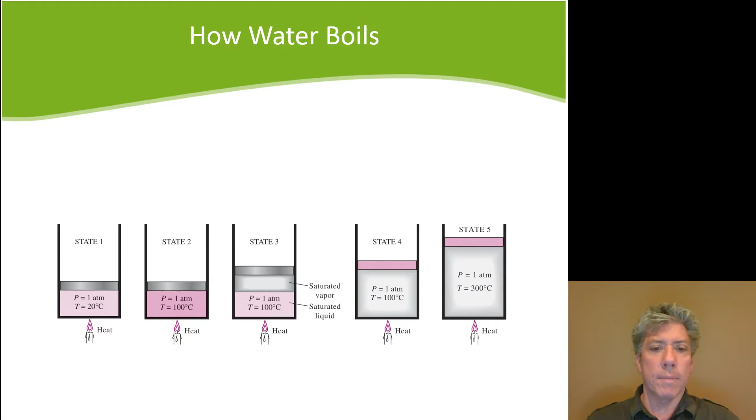So some terminology to make sure we get it right. The liquid at 20 degrees Celsius, 1 atmosphere in state 1 is called a subcooled liquid or a compressed liquid. And all that means is that it's below the temperature at which it could begin to boil. Once it gets to the point where it could boil at 100 degrees Celsius, we call it a saturated liquid. In other words, it could vaporize.

Now if we add a little more energy, some of it will transfer into the vapor phase. Now once we have both vapor and liquid, we call it a saturated liquid vapor mixture. Now be careful of this terminology also, because mixture doesn't mean that it's mixed up real well and we got vapor bubbles in the liquid. It doesn't mean that. I mean, it may be, but a lot of times we think about it as those two phases being totally separate from one another. So that's a saturated liquid vapor mixture.

Once we get to state 4, now we've got only saturated vapor. The last drop of liquid has boiled off, and we have a vapor that really is about to condense if we extract energy. But if we continue to add energy, then the temperature goes up above the boiling point at that pressure, and it becomes what's called a superheated vapor. And as you continue to add energy and the temperature goes up farther and farther, it's still a superheated vapor. It's above the temperature where it could condense out.

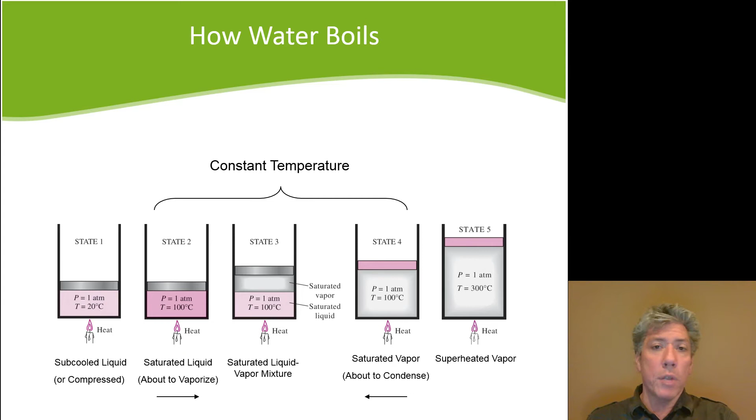Now notice that during the process of boiling, the phase change process, we observe constant temperature, and one of the reasons is that we have a constant pressure during that time. And it turns out we can only have 1 degree of freedom. So I'll talk to you more about what that means in just a little bit. But the temperature and pressure actually depend on one another during this transition time.

Now you can plot the saturation temperature versus pressure, or the saturation pressure versus temperature. In other words, there's a magical temperature given a pressure where the water will begin to boil. And it's not really magic, obviously, but it seems like it. If you change the pressure, then the temperature at which the water begins to boil changes as well. So there's a relationship between the two.

As a matter of fact, in the back of your book are what are called saturated tables. So you should grab a tab at this point. This is the first tab I'm asking you to add to your book. Table A4E and Table A4 are two tables that you should tab right now. So that's page 890 for A4E. I don't have the A4 page in front of me.

What you'll notice about the back of your book is that the appendices are first metric and then English units, but it's the same thing in both with a couple of really small exceptions. So for now, go and find those two pages and make sure you tab them saturation tables, okay? Because that's what they are, or steam tables. That's the way we'll refer to them as well.

Now, if you notice, the first column is temperature, the second column is pressure. Now, if you turn the page I think 1 or 2 pages, you'll notice that you'll have pressure as the first column and temperature as the second. Turns out that the data in those two sets of tables are exactly the same. Well, they represent the same thing, but they're for different data points, okay? But they're representing the behavior of water, or the chemical H2O.

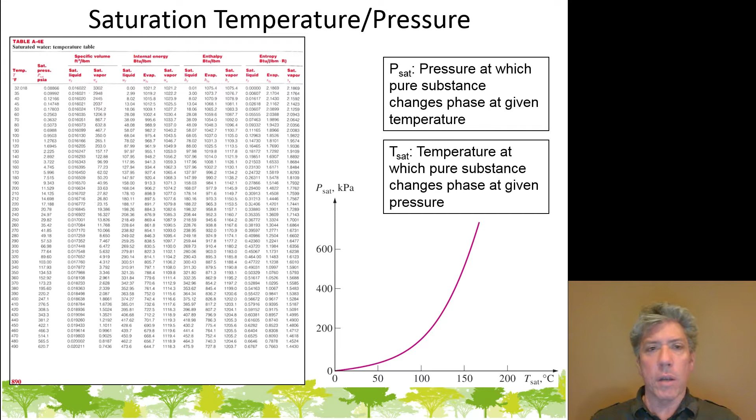Let's talk about latent heats a little bit. What is a latent heat? Well, remember we said that during boiling we had to add energy to the liquid water to get it to change phase into gas. So that process, the amount of energy that we have to add to completely transform all the liquid into vapor, that is called latent heat. It's heat that we have to add, or energy we have to add to cause the latent transition from one phase to another.

Now, it turns out that there's actually two latent heats of particular interest to us in this class, one usually more interesting than the other. The first one is the one you probably think of, the liquid to vapor transition. If I take a pot of water and I sit it on the stove, how much energy do I have to put into that pot to get all the liquid to change into vapor?

Well, of course, the more water you have, the more energy it's going to take. But if you look at it on a specific basis, or a per unit mass basis, it turns out it's 2,257.1 kilojoules for each kilogram if we're boiling at 100 degrees Celsius. And of course, if we're boiling at 100 degrees Celsius, that's the saturation temperature, therefore the saturation pressure is 1 atmosphere. Okay? Those two again go hand in hand.

So I should have something that says 100 degrees Celsius, comma, 1 atmosphere, or 101.325 kilopascals. That's the amount of energy that it takes to boil off 1 kilogram of water. Or you could say it this way: if I have 1 kilogram of vapor, how much energy do I have to pull out of it to get that vapor to go back to the liquid phase? Well, it's the exact same amount. It's 2,257.1 kilojoules per kilogram if we're at 100 degrees Celsius for our boiling process, or our condensing process in this case.

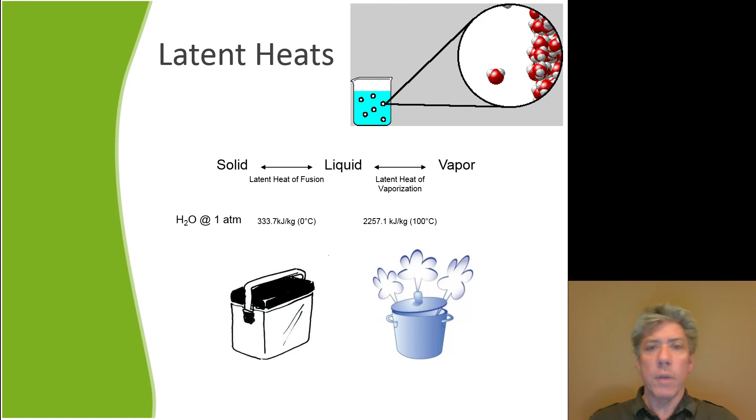Now you'll hear a lot about my famous boiler system. It turns out I actually heat my house with wood. Someday I want to put in something called a geothermal system. It's also known as a ground source heat pump. But that's pretty expensive, and I just haven't put the money into it yet.

But right now I heat my house with wood, and it's not like I'm belching out smoke into the neighborhood. I live in a fairly rural area, and so my neighbors don't mind. It does actually emit smoke sometimes when it's not burning right, but the way the boiler is supposed to work is it has an upper and a lower burn chamber, and what it does is it generates smoke, and then it adds superheated air to it to burn the smoke.

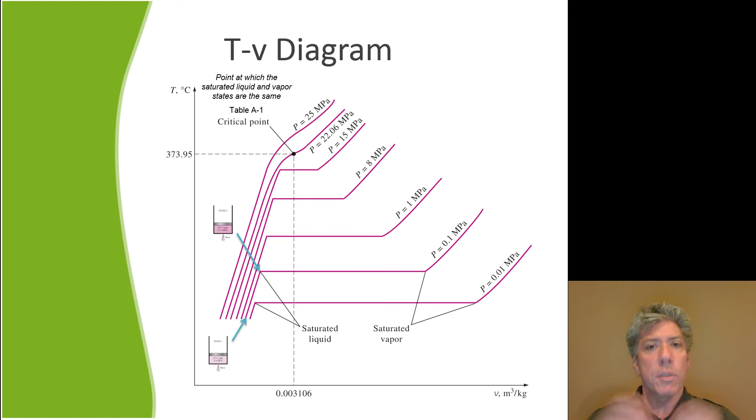I don't need all of the energy that is represented by a stack of wood, but on the other hand, it's hard to get a small stack of wood to burn hot. And so what you really want to do with this boiler system is you want to load it up with wood, and not really fill the chamber completely, but put a good amount in it so that you can get it going and get it running nice and hot, because when it's running hot, it's running really well. It's burning efficiently. The stuff coming out of the chimney is absolutely clear, and you can't even tell that the thing is running.

Okay? So what you want to do then is burn hot and fast and as long as possible, but you got to have somewhere to put all that energy, right? Energy can't be created or destroyed, so what do you do with it? Well, what I use it for is to heat up water. In fact, I'll take water from about 50 degrees, that's a local ground temperature roughly, up to about 200 degrees.

And then I don't have to load the boiler overnight, right? I don't have to load the boiler for a couple of days sometimes, especially when it's fairly mild out. And that gives me, it's kind of like a capacitor in the electrical world, or a flywheel in the mechanical world. It's a place to store energy to kind of smooth out demand. Okay, so I put all this energy into these tanks.

Well, wait a second, 1,000 gallons of water. If you change the temperature of that water, do you suppose it expands? Yes, it does, and that's the whole point of my story. Just like here, as you add energy to that water, it changes size. Now, it's not much. In the 1,000 gallons that I have, I've calculated that the volume changes by about 50 gallons or so. But that's still significant.

As a matter of fact, it would literally blow my pipes apart if I didn't have somewhere for that extra water to go. So I have what's called an expansion tank. And the expansion tank has a diaphragm in it. And that diaphragm just has air pressure on one side and water on the other. And as the water pressure increases, because it's trying to expand, it compresses the diaphragm.

The air pressure goes up a little bit, but it can compress the air fairly easily. And there's some place for all of that extra water to go. Anyway, long story. But I will talk about the boiler more, so I thought I'd introduce you to it now. So we're at that second point.

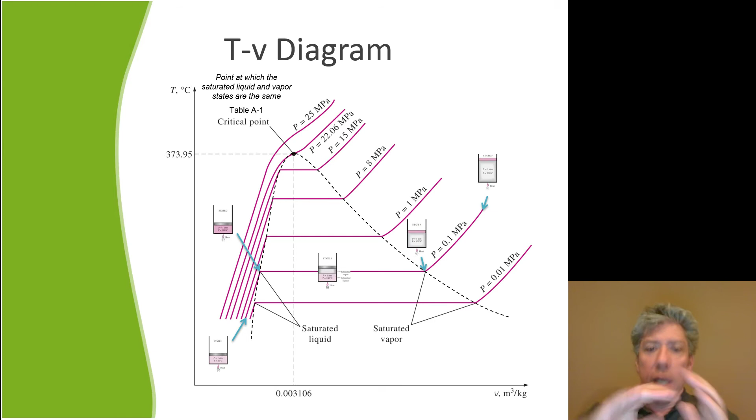Now we can kind of play connect the dots with these, right? I mean, look at it. It's pretty obvious that there's all these points on the right-hand side and the left-hand side, and if we connect those together, we get a shape called the vapor dome. Notice that this shape separates out the phases of the diagram. To the left-hand side we have all liquid. Under the vapor dome we have a mixture of vapor and liquid, and to the right it's all superheated. And you might look at this and say, well, there seems to be this interesting thing that happens up at something called the critical point.

Well, at the critical temperature and pressure, what happens is zero energy is required to transform from the liquid to the vapor phase. You're going along just fine. Everything's liquid, liquid, liquid, and you add just that little bit more energy and boom, it's all vapor. So it's a zero amount of latent heat. The latent heat of vaporization is zero at the critical pressure and temperature. Okay? Above that, you don't really see the transformation. You can't really see a difference between the liquid and the vapor. It just changes, and you don't really see it change significantly. It's hard to see a boundary between the liquid and the vapor.

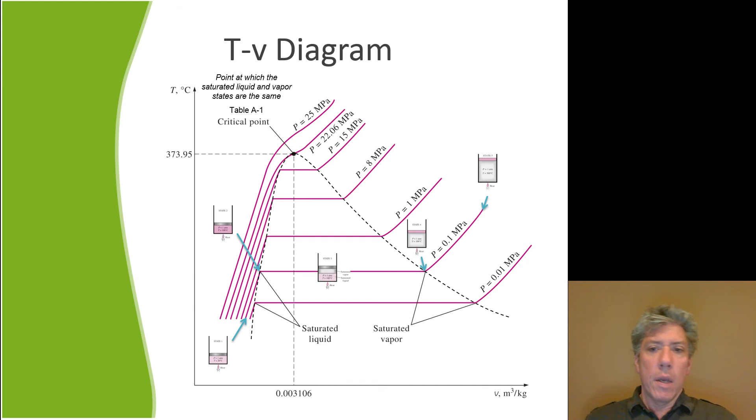So we've kind of played connect the dots. Now we've discovered this thing called the vapor dome. Let's try to understand that vapor dome. Say we invert it, right? So let's make the experiments the dotted lines, and let's make the vapor dome the solid line. Now on the left-hand side, from the critical point down on the left-hand side of the vapor dome, that line is called the saturated liquid line, because that's all the points at all the pressures where we would have all saturated liquid about to boil off our first bubble of vapor.

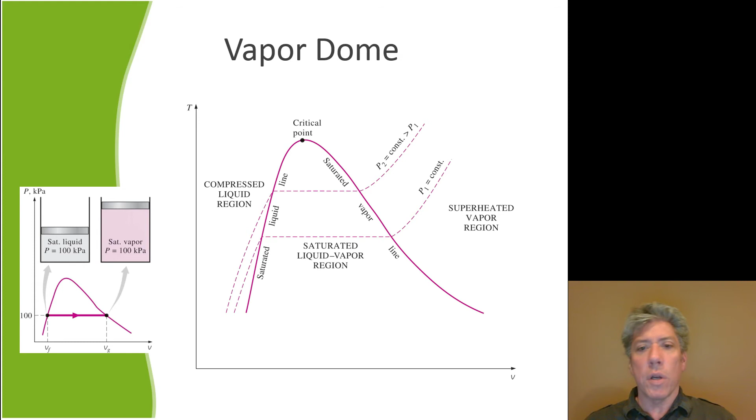And on the right-hand side, the critical point down on the right-hand side is called the saturated vapor line, because that's the last point, if we're adding energy, where the temperature will no longer change. After that, the temperature has to start going up. So that's the names of these things. We've got the compressed liquid region on the left, the superheated vapor region on the right, and the saturated liquid vapor mixture region in the center.

Now that was so much fun, kind of like Sharknado 1. Let's make a Sharknado 2. Let's see how water boils part 2, right? If you're not asleep by now, this is pretty much guaranteed to do it.

What if we do a similar experiment, but this time instead of holding pressure constant, let's have some type of control where we hold temperature constant. Now we're not going to hold temperature constant by adding or removing energy. As a matter of fact, we're just going to keep relentlessly adding energy like we did before. But now we're going to have a pile of sand on top of the piston, and we're going to remove some of that sand.

We'll take some weight off and control the pressure that way. Now, if we're at 1 megapascal and 150 degrees Celsius, we will be in the compressed liquid region. As a matter of fact, open your book to the saturated tables. You should have marked it earlier, table A4, and I'm sorry again, I still don't know the page number. Now look up a temperature of 150 degrees Celsius and look at the pressure you read off. You'll read off, I think, 0.47 some odd.

It rounds to 0.48. So if we're at a pressure of 1 megapascal, that means we have excess pressure that's preventing boiling. So we're not at the saturated temperature, saturated pressure pair that we need for boiling to occur. We are in the subcooled liquid region, or the compressed liquid region. Now understand where those terms come from. Subcooled liquid refers to, given a pressure, the temperature is too low to boil, but the compressed region refers to, given a temperature, there's too much pressure for it to boil. Okay? That's why it's called either one.

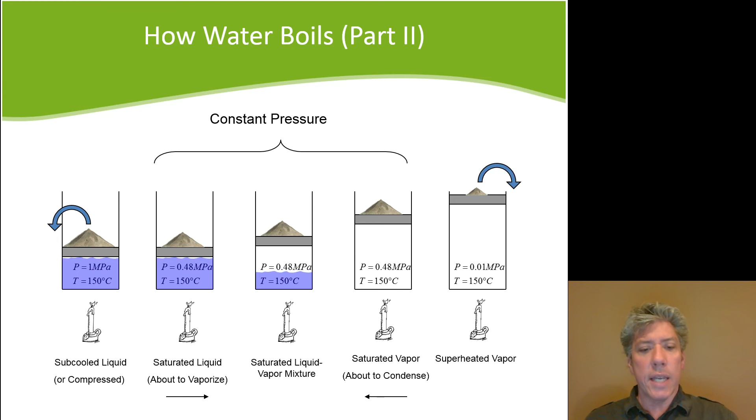There's constant pressure, of course, during the latent transition. And we've got the superheated and subcooled regions. Now we can draw a PV diagram. Remember before it was a temperature versus volume diagram.

Now we can draw a pressure versus volume diagram where each of the experiment lines represent experiments performed at constant temperature. And what you'll notice is in these experiments, as we add energy, we have to decrease the pressure for the temperature to remain constant and for us to remain on that constant temperature line. So it makes sense that the volume's going up because we're still adding energy, the water is still expanding, but in order to maintain the temperature, we've got to go down in pressure. So we're moving down and to the right on those dotted lines.

We finally get to a point, just as we did before, on the saturated liquid line, where we have a saturated liquid. It's about to evolve the first bubble of gas. If we continue to add energy, we move through the saturated liquid vapor region at constant pressure and constant temperature, by the way. Remember, these are still lines of constant temperature. And then we eventually get to the point where there's no more liquid, it's all vapor. We continue to add energy and we move into the superheated vapor region.

But as we move into the superheated vapor region, we have to reduce pressure farther and farther to maintain the temperature constant. And of course, since we're boiling off liquid, the average volume of the system increases. And as we continue to add energy to the gas in the superheated region, the volume continues to increase as well.

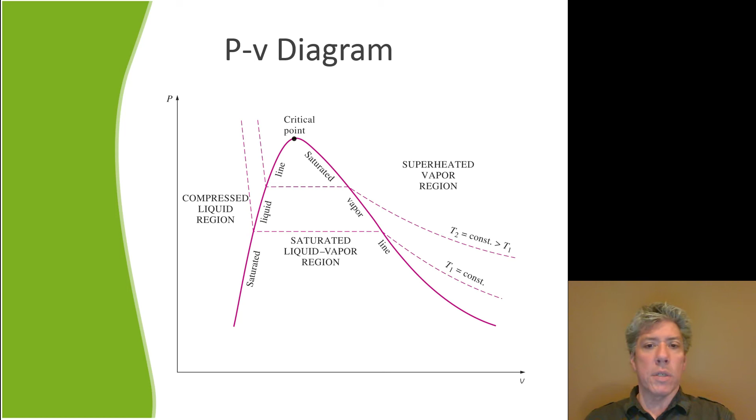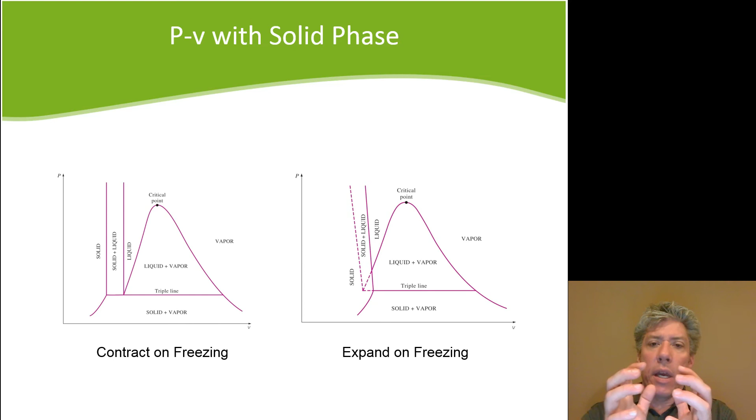Now we can extend this to include another phase. We can include the solid phase of a substance as well. As a matter of fact, we can do this for water, we can do this for other substances, because other substances also have solid to liquid to vapor transitions. Now, some substances contract when they freeze. If you take a certain volume of liquid and you start cooling it such that it begins to freeze and crystals begin to form, it'll shrink from the very beginning. But water's a little bit different. Water actually expands a little bit, and then when you finally reach all solid, then it starts decreasing.

Okay? So it's a little bit difficult to see or to understand what happens to substances that expand on freezing like water. Let's start with substances that contract on freezing. You see the vapor dome there that includes liquid, liquid vapor mixture, and vapor. But there's actually a triple line, which is a line of pressure below which you can have solid and vapor in equilibrium with each other.

And there's also these vertical lines where the volume hardly changes at all, where we're going from liquid to solid, okay? And then from that solid-liquid mixture, that region in between those two vertical lines, eventually we reach the solid vertical line where we have only solid, and then we have the solid region to the left, which we could continue to cool, and it would continue to shrink, right? But it's still solid. I guess you could call it a subcooled solid. It's not near the point where it could go into the liquid phase.

All right, what about substances that expand on freezing? Well, this is a little more difficult. Try to hang with me here, and in just a second I'll show you a figure that I think will help quite a lot. If you have just liquid water, we're in the liquid region, so we're to the left of the vapor dome, and you cool it down, it will shrink, right? So its density increases, its specific volume decreases. Eventually you'll reach the dotted line that's angled a bit, okay?